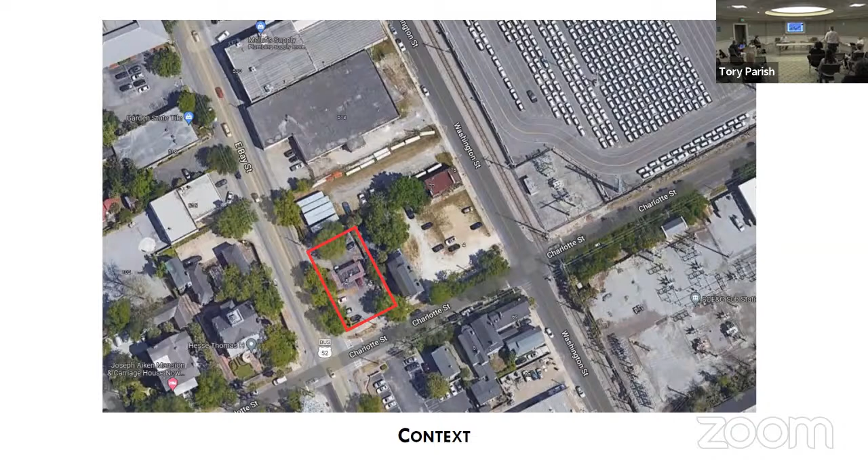I think Tory just mentioned there's an old bank drive-through building there that was built in 1993. I don't think it's been used for a long time; it's just a vacant parking lot basically there now, so we'd like permission to tear that down. We did go through a rezoning of the property, I think it was last week, with the Planning Commission, and received unanimous approval for residential rezoning. We'd like to be able to tear this building down and proceed forward with our plans. So if you have any questions.

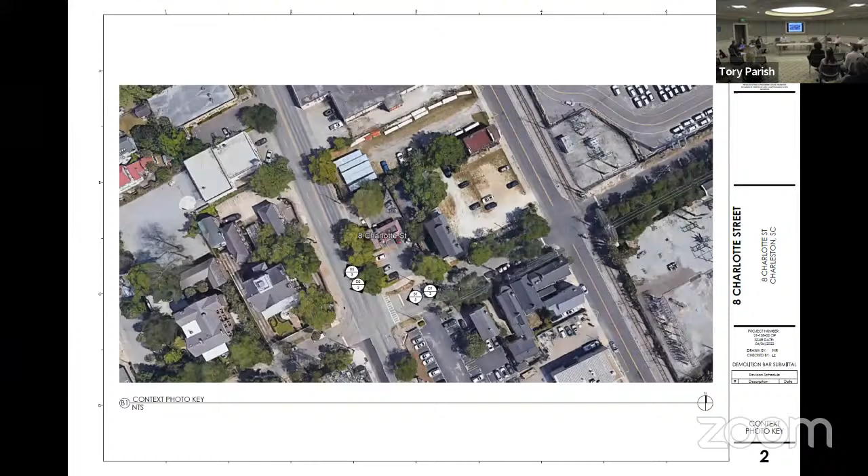Any public comment? We don't have any written public comment. Any member of the public here to speak on agenda item number 2? Hearing none, city staff comments and recommendations.

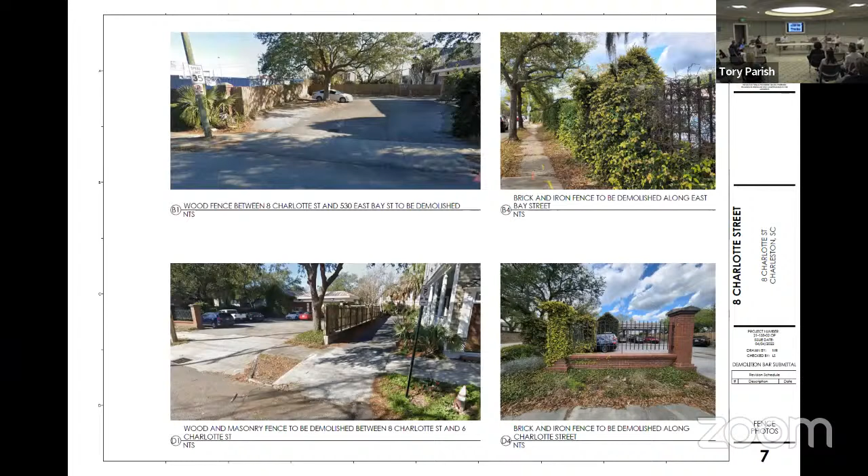A couple of staff comments. Reviewing considerations for demolition review found in section 54-240, article B, staff finds nothing that would elevate the structure and site elements on the property to be important enough to be saved from demolition or saved for a future project. The date of construction for the building and site elements and the auto-oriented function do not contribute to historic, cultural, or architectural importance. The applicant might consider retaining the wood fence due to its good condition if useful, and we're recommending final approval for demolition.

Thank you. Just as a matter of protocol and good order, I'd note that on one of the slides there's a typo that says the structure was circa 1933. I know it got revised, but for anyone who cares about 20th century architecture and our sensitivity to it, this is a 1993 structure, not a 1933 structure, as Mr. Hofford said in his remarks. Just making sure we're all on the same page on that, we don't want any confusion. No, just making sure it didn't end up in the paper.

That concludes the city staff comments and recommendations. Mr. Hofford, if you want to rebut or have anything to add, you may.

Yeah, very quickly, that wooden fence is in the way of any construction and it's uncontrolled, so I just want to make sure. No, and we don't mean that as a directive. Okay, thank you, nothing further. That's it, Mr. Hofford. Okay, very good.

We will now move to board discussion and potential vote on this agenda item. Is there any board discussion on this? I've prepared a lengthy statement that I can summarize by a motion for final approval. There's a motion for final approval for demolition from Mr. White on agenda item number 2. There's a second from Mr. Metters. I'll proceed to call the roll.

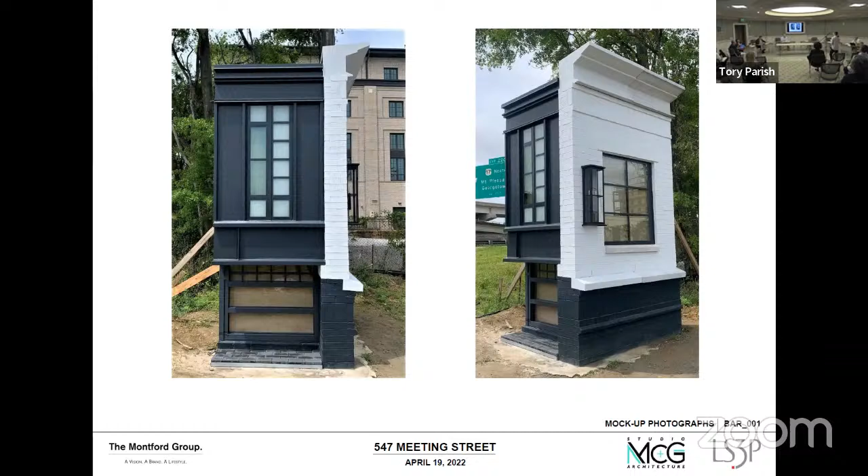These profiles are going to be 60 feet in the air or higher. It's a lighter weight material, so it's more appropriate for this application. It's also non-porous, so compared to the GFRC, it won't have as much discoloration and seepage of water, and it can be installed in longer sections, which is more in line with our design intent. We're also confident in the lifespan of the material, as well as the color control we have and the crisp, clean look it gives. You can go to the next slide to see the details comparing the two materials, as well as take a closer look at the joints in the metal panel.

It should also be noted that the condition where the metal panel meets the FRP cornice on the top corner does not exist in the building. It's just how the mock-up panel is constructed. And I think those were the main concerns. I hope I've addressed them.

I look forward to working with the board as this project moves forward, and I appreciate all of your time. Thank you very much, Ms. Brown.

Public comments on either category on this agenda item? None? None written. Thank you.

City staff comments and recommendations? Sure. Sealant around dark windows, that white painted brick should be white. Applicant discussed this prior to the meeting and agrees.

Additionally, sealant and metalwork at the metal portion of the mock-up will need to be cleaned and tightened. It is believed this has been discussed by the applicant prior to the meeting as well, and they agree.

The applicant requested the additional placement of GFRP on the mock-up as an alternative to the GFRC band at the second floor. While having some advantages in terms of handling, forming, and placement, staff still prefers the GFRC for its perceived increased durability. It was also discussed whether to paint the cast stone windowsill to match the brick.

There are various ways to think about this, and staff would like the board's direction on this. And modifications and corrections of the above items to the mock-up should take place and be approved prior to the start of exterior work.

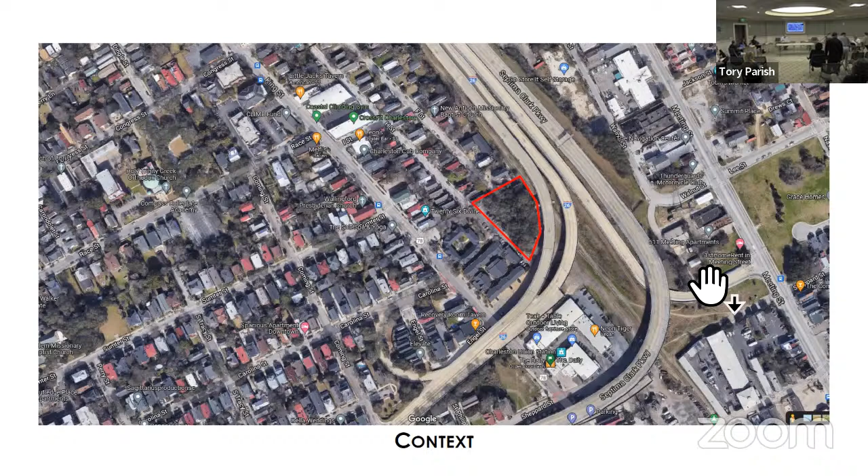Thank you, sir. My name is Brian Hessler, I'm an architect with McMillan Smith, creative architects for this project. Our owner and representative, AHE, unfortunately had a medical issue, so he could not be here today. But we do have Remark Studio here to talk about some of the landscape architecture portion as well, when we get to that.

For the project, I'd like to emphasize that for this particular project, affordable housing means 30 to 80% of the area median income. There have been questions about that from the community. Our client for this project is the city. We're hired by NHE, who's hired by the city. There are improvements on the housing authority property as a scope part of this, but they're not the client for that, so I just want to clarify that before we continue.

This project was presented to the board in the fall of 2021. We were deferred. We took those comments back, and I think we have a design that is in the right direction this time. Due to the scope of the building and the site, I'd like to request a 10-minute time extension from the board. Certainly. Any idea how much additional time? I'd like to do 10 minutes, please. An additional 10, sure.

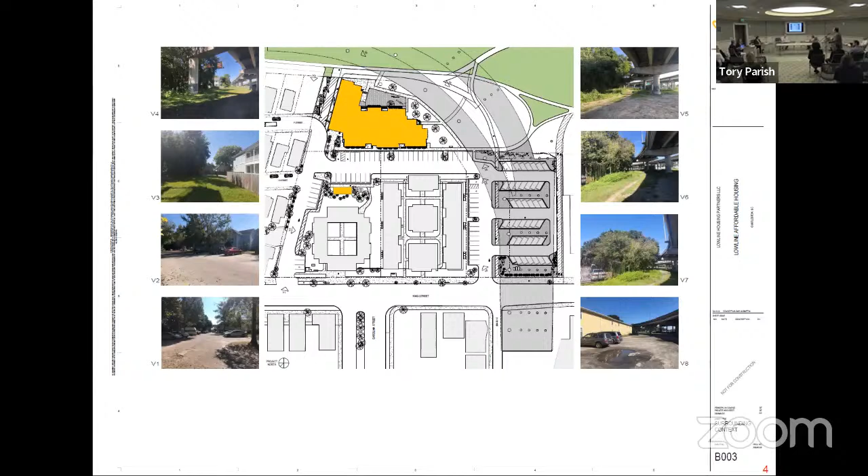You can see a little bit of that context here. Currently, the overpass underneath there is a little bleak. See the blue housing authority building in that photo. Next, please.

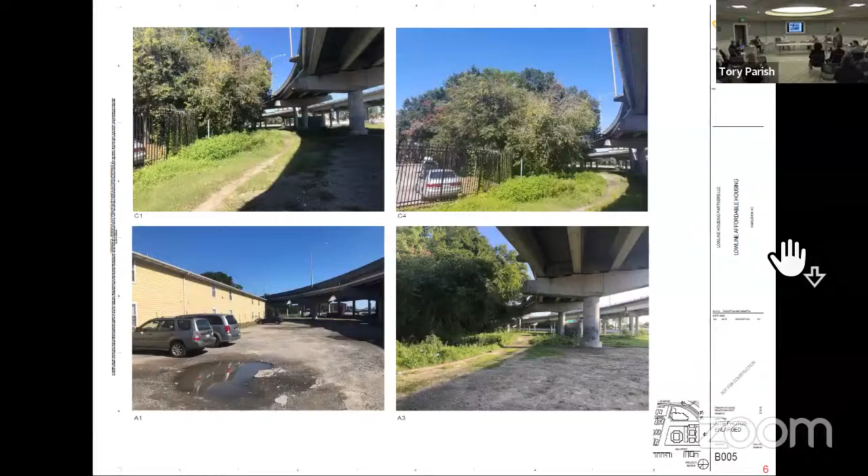Additional context, photos of the underpass. Next, please.

The parking for this project is self-contained within the development. There are approximately 90 spaces. 30 of them are dedicated to the housing authority, 30 of them are dedicated to this new development, and 30 of them are dedicated to public use for access to the low line, restaurants, bars, whatever the public might need in that neighborhood. Next, please.

F and H Street will be connected to this project based on direction from the city, but direct access to this development is not needed through F and H Street. It provides a connection to the community, but it's not required for the success or failure of this project.

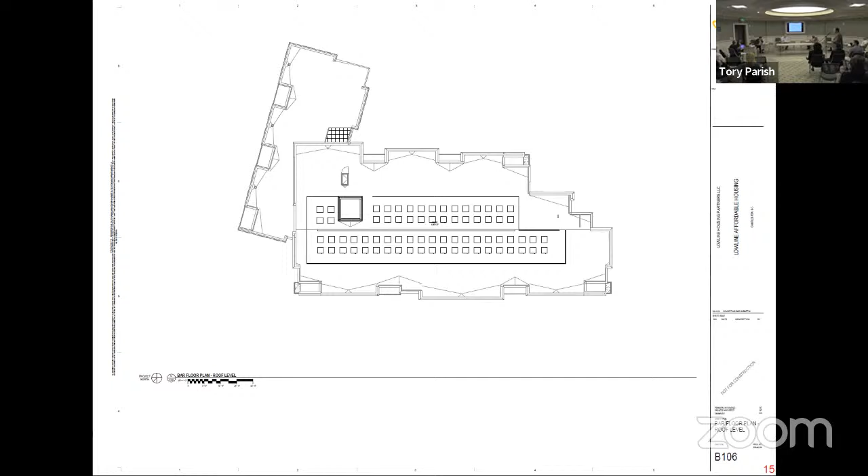Next, please. And that language is carried through all the facades.

One of the other comments we got from the board last time was the depth of the punch windows. That has been increased from about 6 inches to 8 inches. It's a little hard to see here, but I want to point out that comment has been addressed.

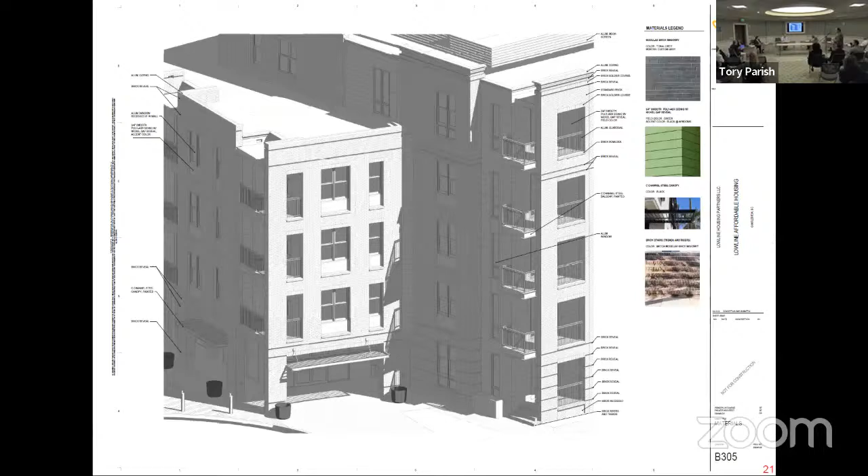Same thing on this facade. I think we'll see a 3D version of it that'll make it a little easier. You can see this in 3D a little bit better with the brick rustication, the shadows, and the unified balconies.

We also got some questions last time on the fiber cement siding. We have revised that to a Boral poly-ash product, a 3/4 inch thick product. It has a nickel reveal and we're running it horizontally, so it matches the more residential siding, but on a larger scale. It also has the ability to have nice, clean, crisp corners where we don't have to have a lot of clapboard trim pieces, which I think works with this aesthetic well.

You can see the brick steps, where previously we just had simple concrete steps.

This is a view approaching the project from King Street. You can see the dumpster enclosure has been relocated, and F Street is opened up on this drawing.

Another view as you get closer to the project. The housing authority buildings would be on the right, and the access to the plaza is to the left. You can kind of see how the massing of the 4- and 5-story portion has been broken down there.

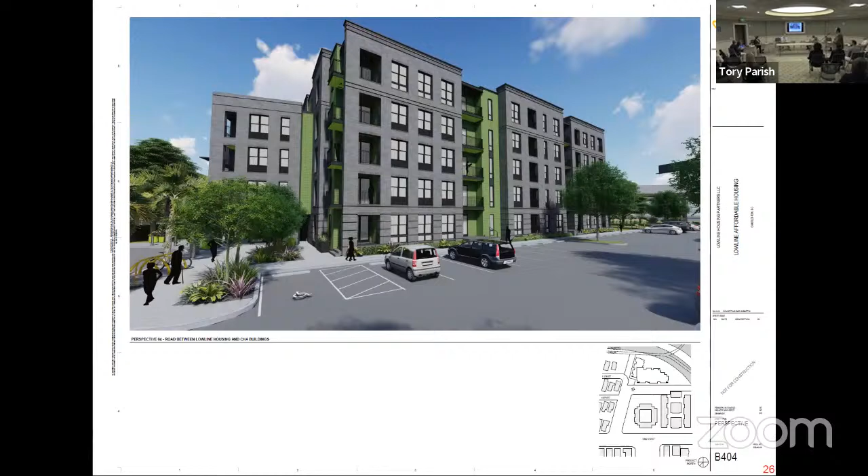This drawing shows the shadows, the brick reveals, the depth of the windows, and the different types of windows in a little bit more clarity than we were able to show last time.

There's what we're calling a courtyard between the building and the overpass that Remark will talk about in more detail, so that there are multiple exterior spaces for the public and the residents.

It's a view of the project from the future low line.

Another view of the project from the low line, looking back at that courtyard.

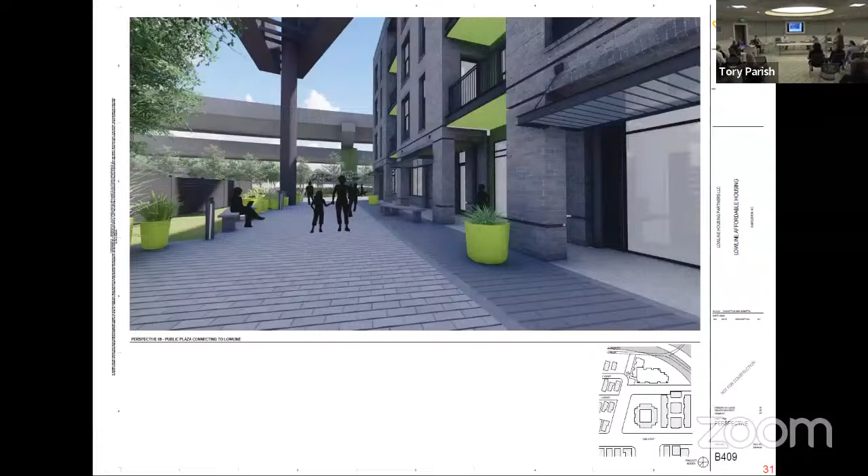This is a view of the plaza area with permeable pavers, and the canopy language has been added to this elevation of the building, where previously it was only at the main entry. So we think that makes this look a little more even in scale and more welcoming than what we had.

We were also asked last time to take a closer look at what we're doing under the overpass, our only frontage on King Street. This area has been a bit of a challenge. Some of the things we're working with here are trying to create an urban edge while also making it safe for the parking lot. So we have something low that creates the urban edge, but we also have a lot of restrictions from DOT for what we can and cannot do on the property.

Our current proposal - you can see with multiple projects under overpasses around town, they look generally pretty bleak, since DOT only really allows fencing. So we're taking a different approach, where we're going to have a series of planter boxes that don't have the foundations DOT objects to. You can block the glare from the headlights, but still promote the safety and security of the parking lot, which we think fixes it.

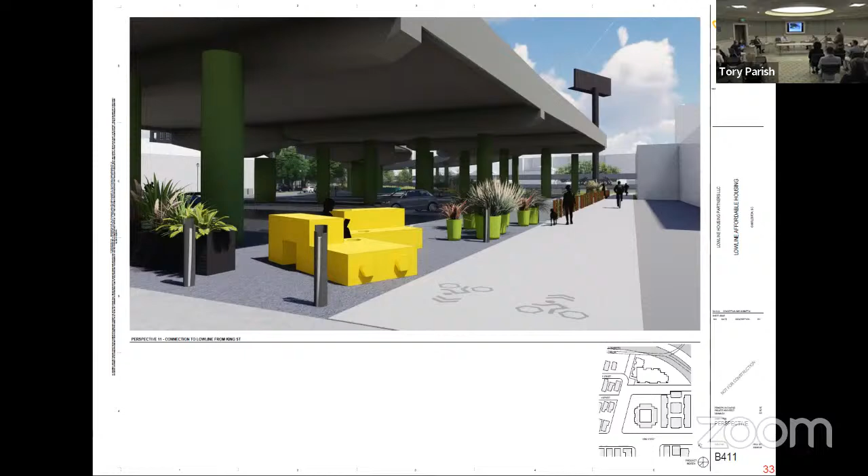We were also asked last time to see if we can make that wall or surface along King Street turn into the connections to the low line and the parking lot. We plan to introduce some type of intervention at that point and carry the planters and site wall through that area. The final form may not look exactly like this, but it represents the idea of transforming that into a kind of gateway.

Unfortunately, that billboard's going to remain there, we don't have to get rid of it. But you can see the detail we put into the cap of the building, and then the other view is as you're going around the building towards the rear. You only get a real brief glimpse of this building from the overpass with the billboard in the way and the direction of the one-way traffic, but we think we've made some improvements to address the concerns we saw last time.

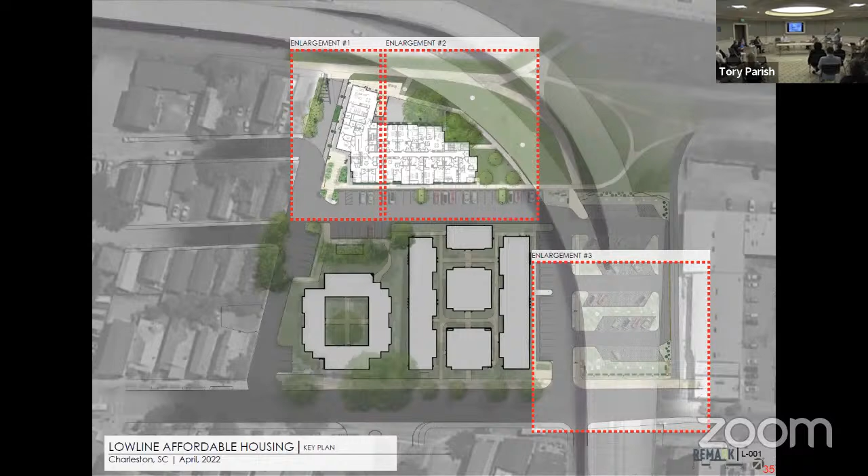The first one is the main entrance. As Brian stated, this is one of the main connections off of King Street, located at Main Promenade. One of the main things is that we provide access to the low line, and as you see, straight through there, we provide that through, and it's as wide as it is due to the fact that we have a fire access easement that we have to provide.

To the left, we have a series of rain gardens and some seating elements that almost mimic some railroad ties, kind of tying back into the whole idea of what the low line used to be, a railway system. And then the rain gardens carry over into kind of the front entryway.

Some of the plants that we're focusing on for the rain gardens are all natives, very durable. This just shows a section to represent kind of the spatial representation through that area, showing that fire access easement and kind of what we built.

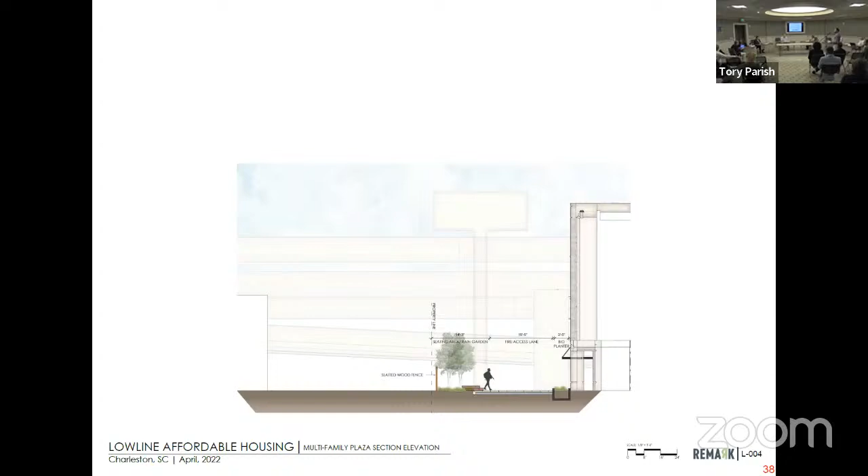The second area of focus is what we're calling the courtyard, creating a space for not just the residents, but for people that are on the low line to look in, and we're thinking about what will they see. But for the residents that will be in this building, we propose to keep this fairly open, but also considering it to be low maintenance.

An all gravel area, considered to be an area for recreation, lounging, some slight furnishings in there. Another key element is the existing oaks that we show. I think they're there, but they are existing. They are a little close to the building, but they're able to be saved.

I just think that'll be somewhat nice to see some greenery pop up over the I-26 overpass, and it also provides a little bit of screening. This just shows a couple plants that we could plant in some planters right up against the building, again focusing on the low maintenance aspect of it, while still providing some greenery.

The last area is the parking underneath the I-26 overpass, connection to the low line. As Brian stated, the main connection to the low line off of King Street is at that bottom right-hand corner. And then another key element is the plant boxes or decorative planters that we have on King Street.

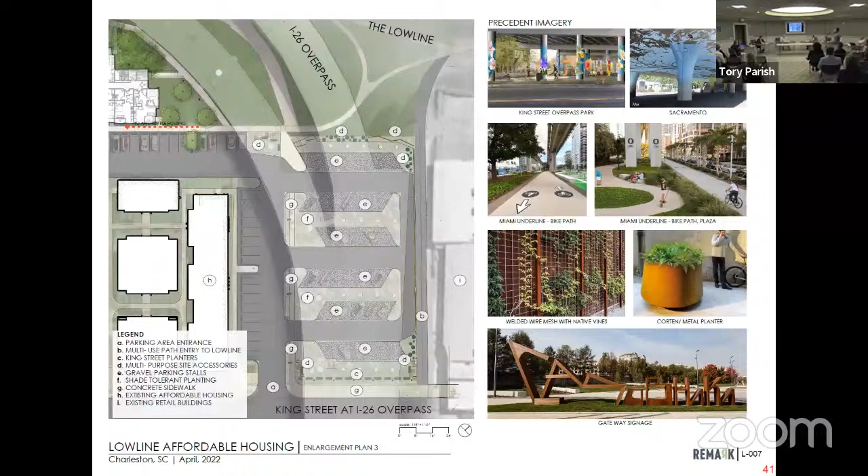Again, going with all native plants, showing what can be planted in a more shaded area, given that we have that I-26 overpass. And again, low maintenance.

Overall, safety is key, so we felt like that cuts down on interweaving of pedestrians and vehicles.

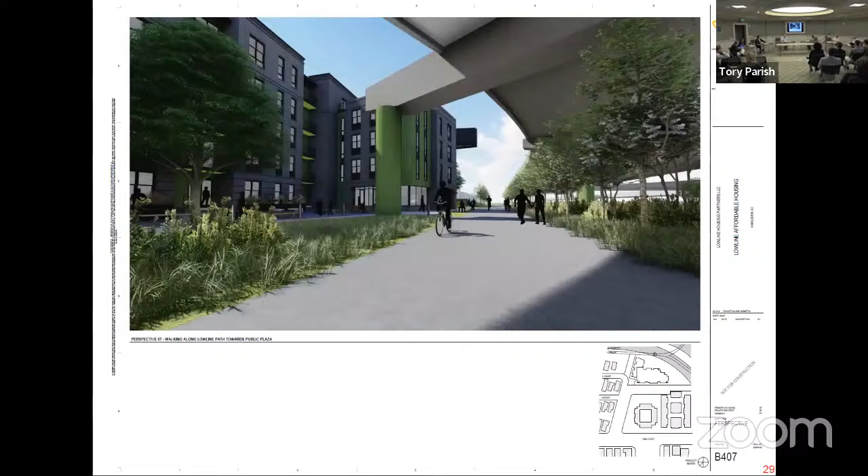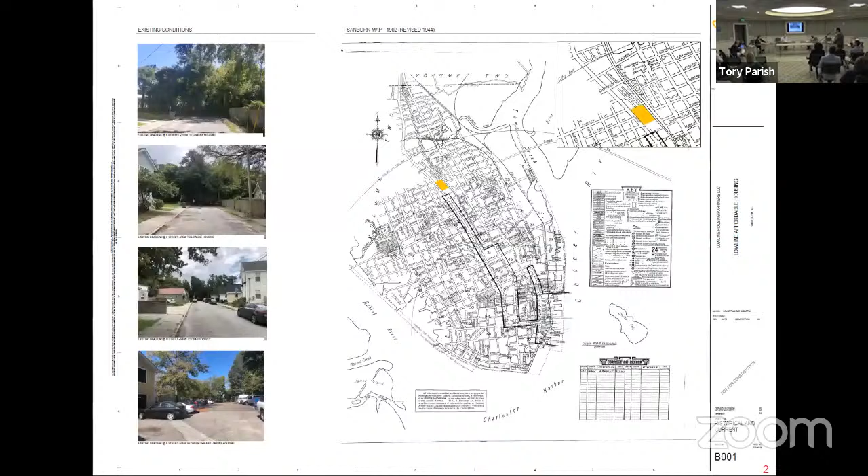Thanks. Right, the blue lines represent connections to King Street. They are two-way, ingress and egress from both those exits. F and H Street, I know there's been some meetings with the community groups. The city, I think, has given them some opportunity for input in terms of whether those streets are one-way, two-way, parking on two sides, parking on one side. And that's something beyond the scope of this project, but that may be resolved in the next year or so, I think.

Mr. Chairman, it's one of my favorite things to do when I get tired and think I don't have anything to do, to go walk up one-way streets and look at structures that you don't otherwise would appreciate, like the neighborhood does.

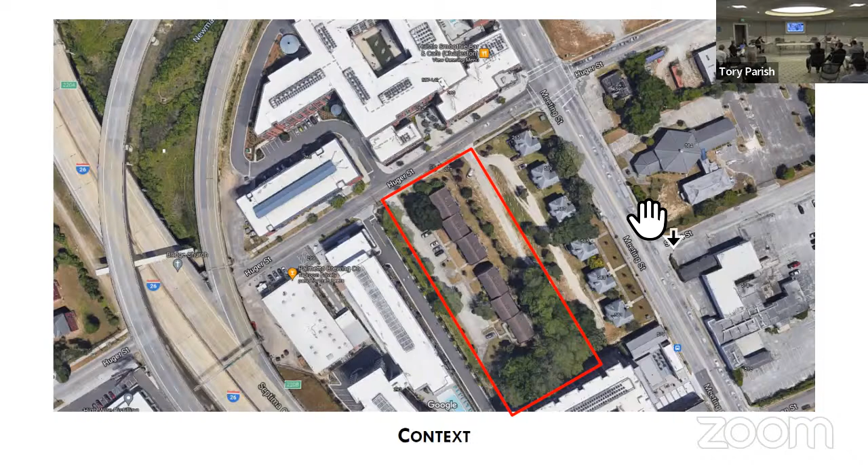All right, we're moving on to agenda item number 5, 275 Huger Street, requesting preliminary approval for construction of a 77-unit affordable housing apartment building with surface parking. This is in the East Central Neighborhood, Height District 4, and the Historic Corridor District. We've got some context slides for you showing the location on the south side of Huger Street, looking into the site as it is today.

Okay, Mr. Eddie Bello is presenting this one. Mr. Chairman, I want to note that Mr. Bello has 91 slides - I'm going to go through each one. But lots of extra time. You asking for extra time now? Mr. Metters is going to ask you questions about 5 of those.

No, well first, again, I'm Eddie Bello with Bello Garris Architects. It's great to see everybody in person - it's been a long time, it's nice to see you all. I also have on our team Nick Litza, who's the project architect, and Jordan Stucco - I think I said your name right.

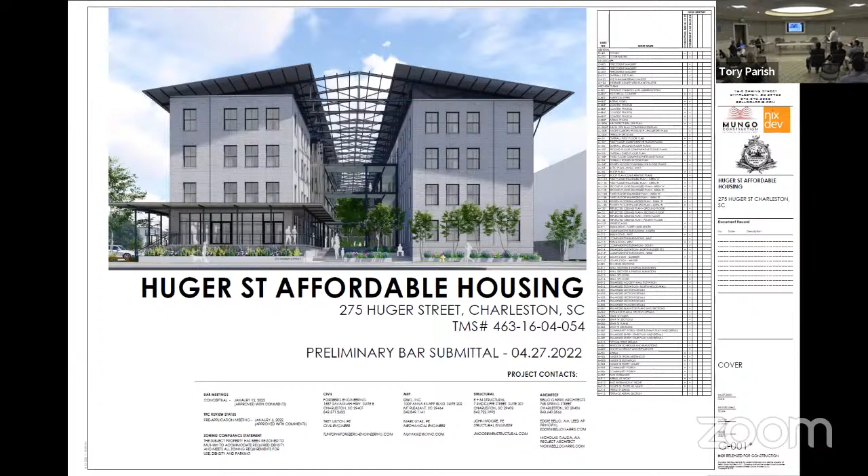All right, next slide, Lawrence. Just to remind everyone, this is again an affordable housing project we're super excited about our design. I'm personally very interested in affordable housing, and it's great to be involved with this.

As I said last time, conceptually we got a lot of inspiration from the history of the site. Historically, this used to be the neck, so the neck moved north. It's always been very industrial, and so the aesthetic we have for this building was derived from that industrial nature.

Next slide, Lawrence. That's good, keep me going. Let's get speed presentation. Like I said last time, we've got some historic buildings on Meeting Street, the Grant homes, that we are away from but sensitive to. Otherwise, we've got a lot of fairly large apartment buildings around us.

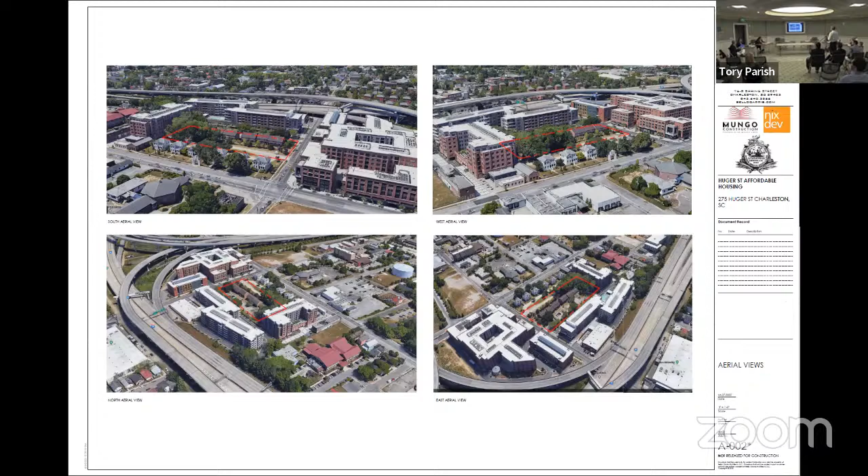Again, more context. Next slide, please. These are the buildings that are actually on our block and across the street. Next slide.

Again, you see where we are. So Huger is the street to the left, and this is a good graphic because it shows the larger buildings that have been built recently, as everyone knows. And then just to the south of us, to the right, are several other fairly large apartment buildings.

And again, this is what we said last time, that they're all very fairly boxy, they feel very heavy. I'm not really criticizing the buildings, it's a tough program to have with the parking and everything. One of the things we wanted to do with our building was to be very distinctive from those large, sort of boxy buildings — something a little fresher. Next slide.

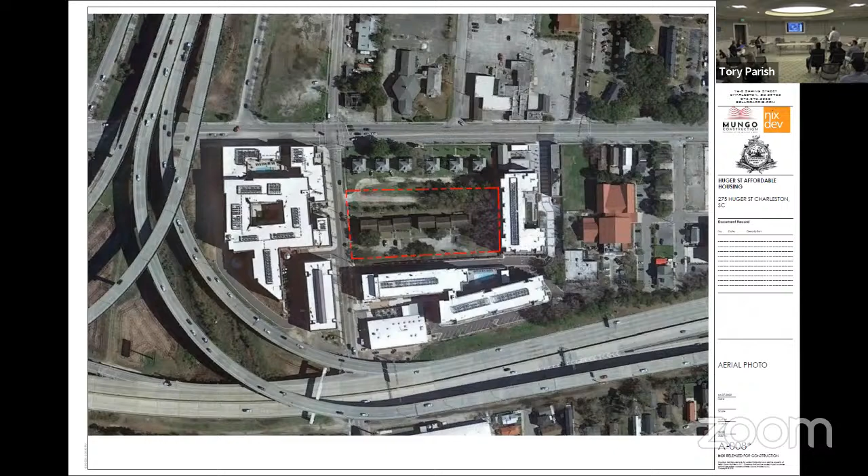So I'm going to go to the next one because I think it's previous and proposed, so I'll talk about the changes more. This is our current site plan. Again, like I said last time, a lot of those other buildings have a typical apartment building approach where you have a double loaded core, a long interior hallway with rooms on either side.

We broke our building into two so we wouldn't have that condition, and we have all of our circulation as a central spine in this sort of open air gallery type space. We front Huger Street, of course, as we should, and we also have a secondary entrance from the parking lot to the east, which by chance worked out so that it aligns with the arch — you can see it at the top of the page there.

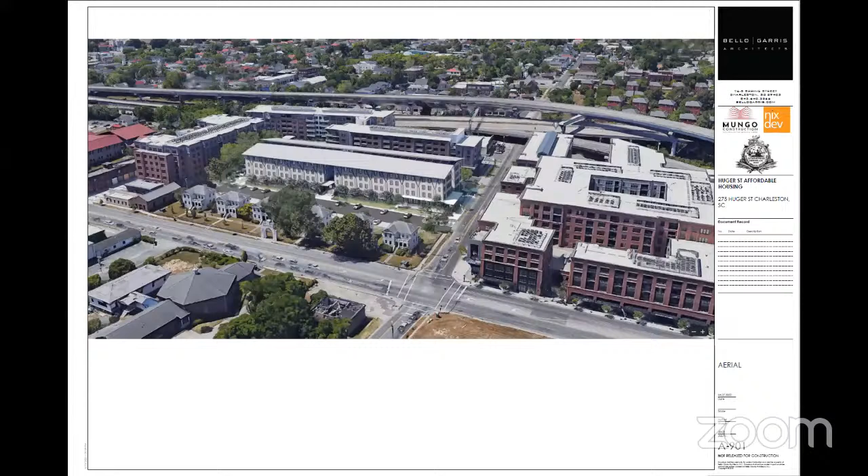Next slide, I think this shows existing, previous, and proposed. Well anyway, let's just stay on this one for a second. Again, the idea is this shed — we've got now four masses going by the shed for the structure. Next slide.

We have, this was all approved at conceptual, an entry element that terraces up. We intentionally did not put this over parking — we wanted to keep it close to the ground as we could, so it addresses the street well. We broke it up in certain ways. Very, very simple structure.

We also eliminated this heated addition space, and now it's completely open. So now basically we have four components, which a lot of our work has been developing. Next slide.

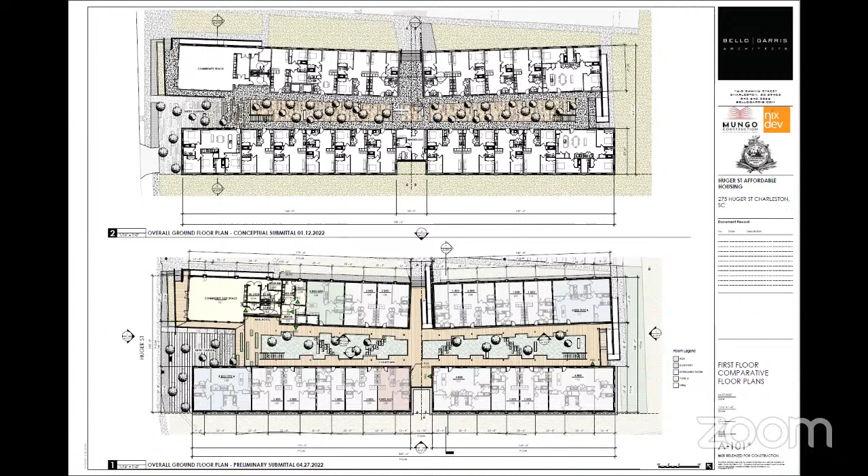I'll try to go through these. So the floor plan in the back, this is our current floor plan, showing previous and proposed. I think the takeaway here is you can see it's all open — very much open space, and you can tell we've increased it as much as we can. Next slide, this is the other floor plans.

Also, I know staff hates dryer vents and those types of things — all of the vents, everything is interior. That's something else. Next slide, so Lawrence doesn't have to put that big red X.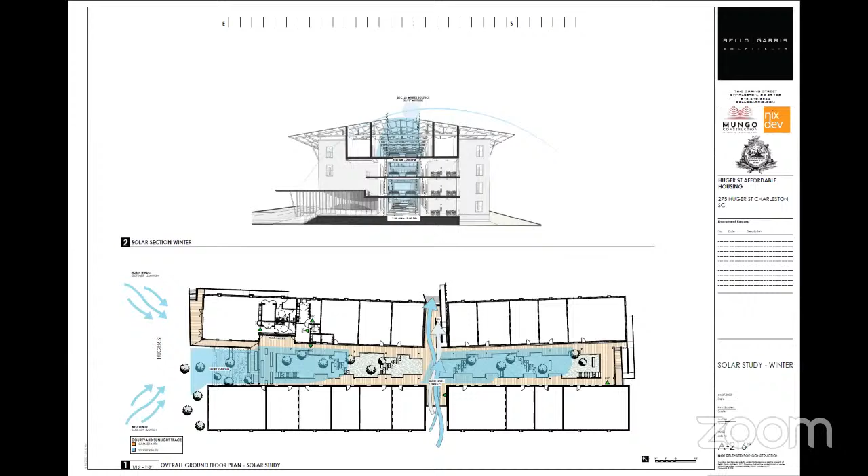Winter, the next one, only has 2.5 hours because the sun's lower, but that's still a good bit of sun. I think it's more important to have it in the summer, actually, because it's a wetter season. And of course, we worked with the landscape folks to make sure the plants selected would thrive in that. I think that was one of the big things we got from last time, to think about that a little bit more.

This is just an enlarged plan of the front entrance. These are conceptual plans, but just to repeat, the UGs are here, we intentionally were addressing Huger. I feel like a lot of our large villages are close to the street, so we pulled ours back a little bit as much as we could, and then they're staggered, and this is a fairly grand but understated step terrace as you go into that space.

I think the takeaway from all our drawings I've talked over is the size, we've done a lot of work since we started developing the project.

Just an enlarged area of the front. I think this shows how the entrance works, this is the section through that entrance, with an outdoor terrace in front. This is a section through the joint.

All right, so here's the front, and I think the next slide is landscape. Stephen with Remark.

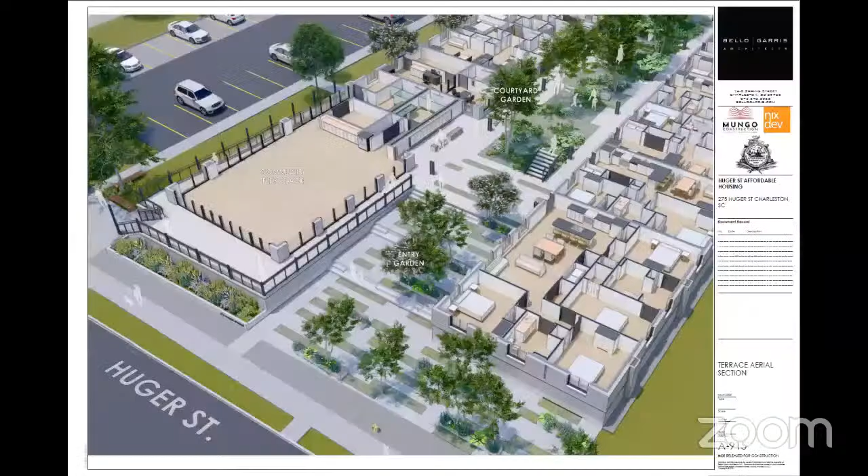I'll go quickly, really now it's just more detail. This is just a section that we cut showing how that terracing works. We were excited to know that we've got some trees in there.

Next slide, this is the east. One of the comments last time was about those pilasters and how to make them a little more pronounced. So we've done that—they're deeper now, and we have a cast stone canopy. We figured out how all that steel would really work.

Our color palette is fairly muted. We're trying to tie into the Grant homes, which is a white brick, so right now we've got this brick as an initial selection. I want it to be very simple. The windows are black with interior detailing, which really isn't a lot of your purview.

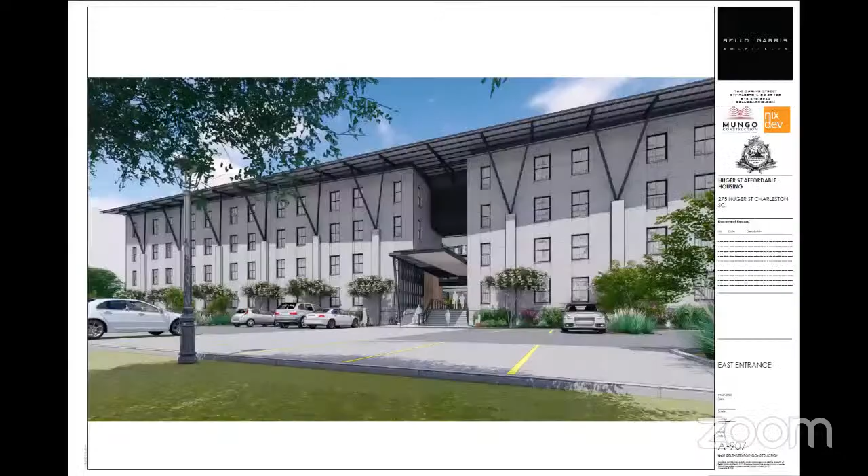Here's a view of that side east entry, which will be heavily used because that's where the parking lot is. There was a comment last time to maybe consider breaking up the roof, and we studied that. We didn't want to do that for a couple of reasons. One, now we have four masses.

The roof joins them together. I think a lot of times the notion of breaking up buildings is appropriate for some of these larger buildings that are up on the street and feel too heavy. This isn't on the street—the part that's on the street is already broken up. So we just felt that breaking it further took away from that shed idea.

Also, we've got to connect the mechanical up there, and if we pulled that roof back, not only would it not provide cover for the entrance, it would create problems with hiding all of our mechanical.

Next slide. This is the entrance—a little hard to read on this slide, but that side entrance has this vibrant wood and steel canopy and wall to mark that entrance. So at the pedestrian level, it is very broken up.

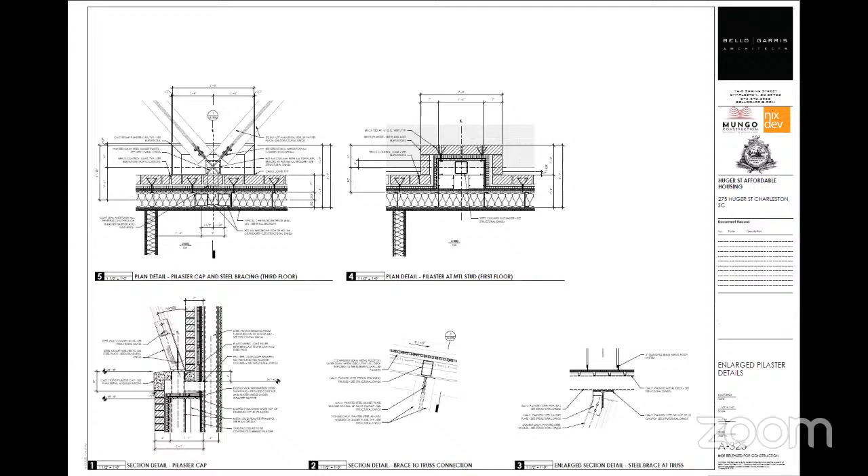More details, if there are questions—pretty straightforward. We worked hard on making sure the details are clean and elegant. Next slide. This shows that canopy. Next slide.

Detail—this is a section through that front, and this is how that canopy works. It's two columns and then a stained canopy, which I think will hold up well because it's underneath. Next slide.

This shows, as I showed last time but more developed now, how the mechanical works up in here. Standing down here, you'll maybe—well, we don't have to see the mechanical anyway. We've also, not that it matters yet for the board, figured out where all the electrical panels go and all that.

Next slide, just more details. We have some cast stone elements—you can see that we have a belt course that goes around this cast stone.

Next slide. I don't know how much of this we need to get into, just showing—again, we're asking for final details to staff, so we're just showing that we've figured out what we need to. Next slide, and really you can just go through these quickly unless there's some reason.

One thing that was brought up last time by staff was that it would be nice to cover those interior stairs. That's problematic for a couple of reasons.

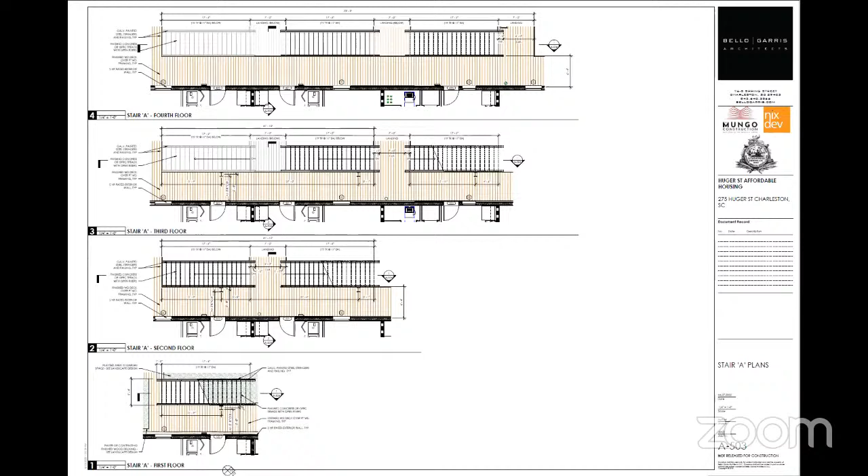But another reason is we're worried that it's going to feel even darker, and our goal in that whole space is to have it as open as possible. We've done similar stairs like this in other projects, and they worked out fine. Williams Stairs is a perfect example. These are just like Williams Stairs. Next slide.

So it's not like we didn't pay attention to that. We studied it, just we couldn't do it. Next slide. Also, I don't know how much you can see that. Next one. Sorry, Lawrence, get to the end here.

I think we have just a couple of renderings at the end. I'll just end on those. Yeah, we figured out most everything we need. Next slide. There's that entry, that entry there, the middle, left. Pretty dynamic wall there. Next slide.

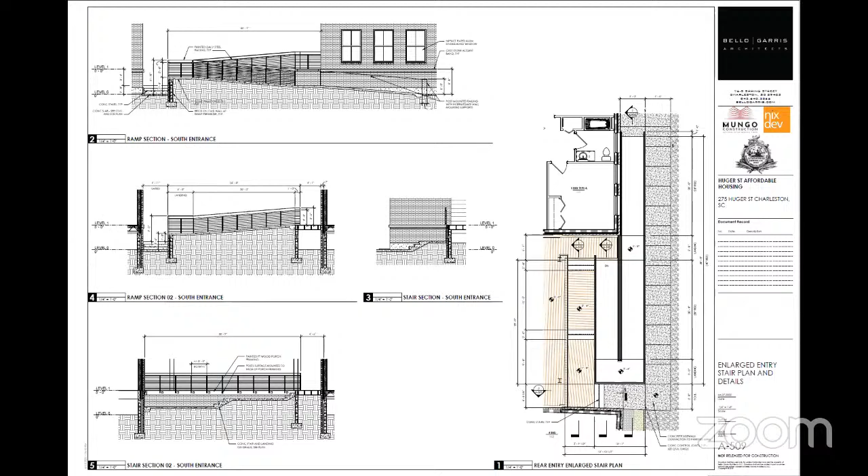Try to see. Yeah, we showed something similar to this last time. And the last one, I think, is a rendering too. Either one of those is fine. Actually, go to the next one. Just end on that.

Okay, I know I went over the time, but I'll blame the remark guys.

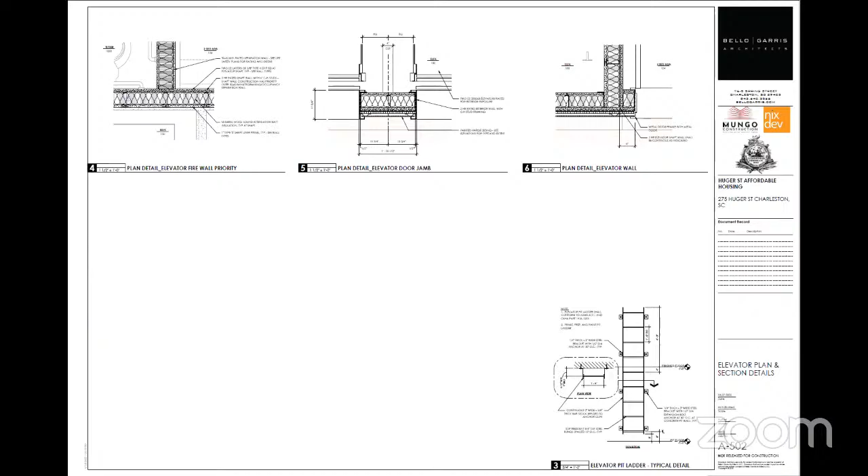Okay, I'm going to actually use that board in a second, but I'll read these first. Three comments. Number one, planting strips are proposed at the north entry terraces and within the boardwalk. To some degree, these reduce the overall width of the Huger Street entry, but provide nicely integrated green space for the main elevation. Staff recommends added scrutiny and coordination between the architectural site plan and landscape plans to ensure a clear and distinct entry path from Huger Street.

Per previous board comment, board motion and staff comment, transitions of materials at horizontal locations should be offset in plane or meaningfully detailed. Concern remains regarding the transition from brick to siding at the fourth floor north end. Please confirm detail or visibility. And three, while not visible from the public right of way at the ground floor at the intersection of the central corridor and the east entry, staff recommends pulling back the southern planting bed to respect what will most likely be the flow of foot traffic.

But I just really wanted to confirm that got the scrutiny it needed to. Number one, if you're coming from this way and you're entering the project, do you step through these terraces, or is this the only 5-foot wide entry? So the comment really is in the vein of, should this be a little wider and grander if it's the only clear distinct path?

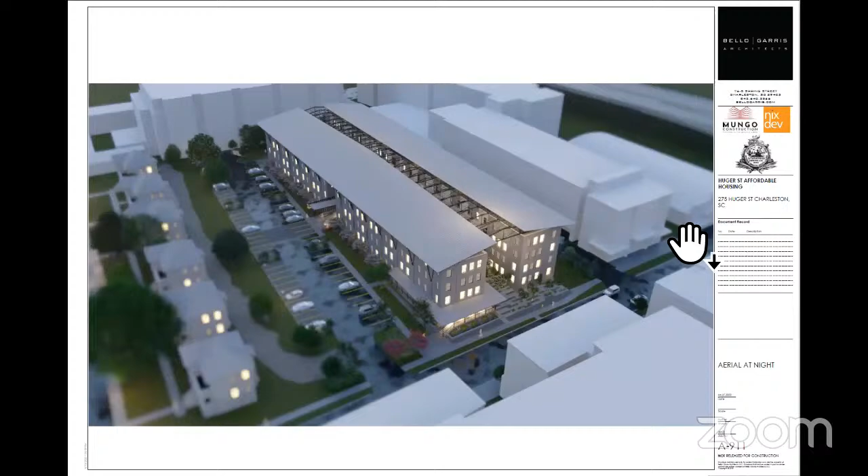How far back it was. Okay, but that's good. Thinking about people coming from the parking lot and coming this way, that just seems like an area where people are going to step through, and recommendation to pull it back and put hardscape. That's all for staff. We are recommending preliminary approval with board and staff comments.

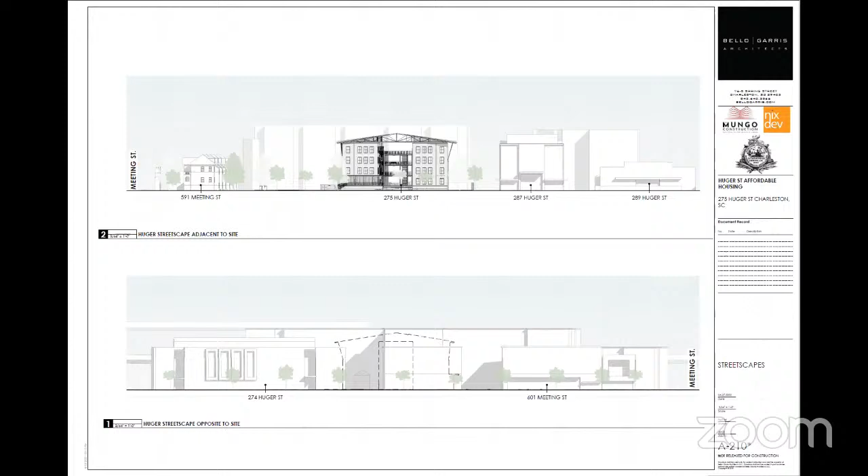No, that was a thing—the horizontal transition up at the fourth floor. You can't really tell, this isn't a clear view, but where that changes, the brick turns back. It's not a brick and then a joint; it actually recesses a little bit, and we're good. You're not going to see Hamilton Street because of the way it is, but it's not just like a butt joint with caulk.

I will repeat my request to please consider final details with staff, since it's not major issues. I might interject—I didn't realize that was part of the request, but we don't have a concern about that. Thank you. And I know Mr. Bello mentioned that twice in phases of his presentation, so we hear the applicant loud and clear on that request.

Having concluded the applicant's response, we will move to board discussions and a potential vote on this agenda item.

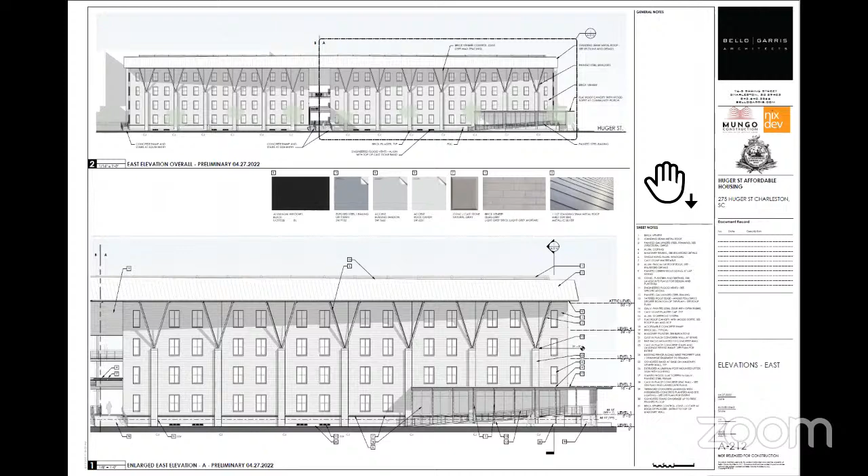Mr. Chairman, I got a couple of questions for Eddie. Eddie, it's nothing we hadn't talked about before. Lawrence, it's either A903 or A913—it seems to show that screening you were talking about, which would connect your primary or main roof to that floating roof.

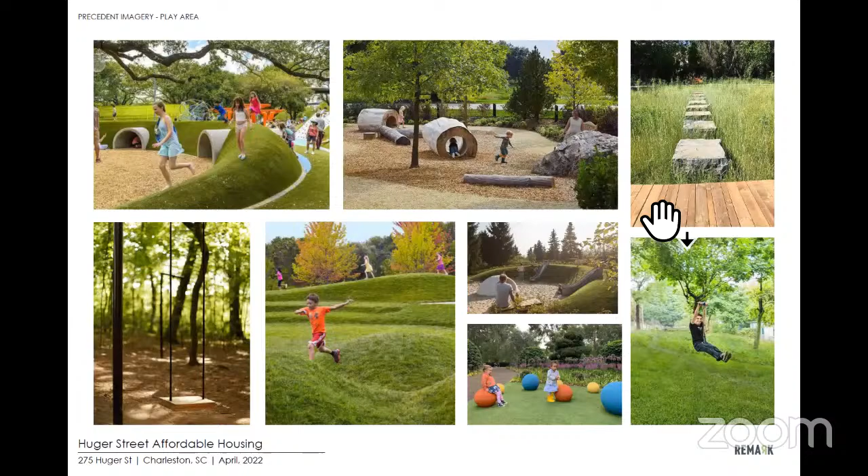So the question is, does that screening prevent birds, bats, or other pests from accessing the area between the top of that building and the bottom of the screen, or is it open? If we're standing on, say, two runs of buildings with a roof on top of that fourth floor, is there access or is it screened? I see it's ventilated in various ways as I study the plan, but I couldn't tell you what the exact detail is.

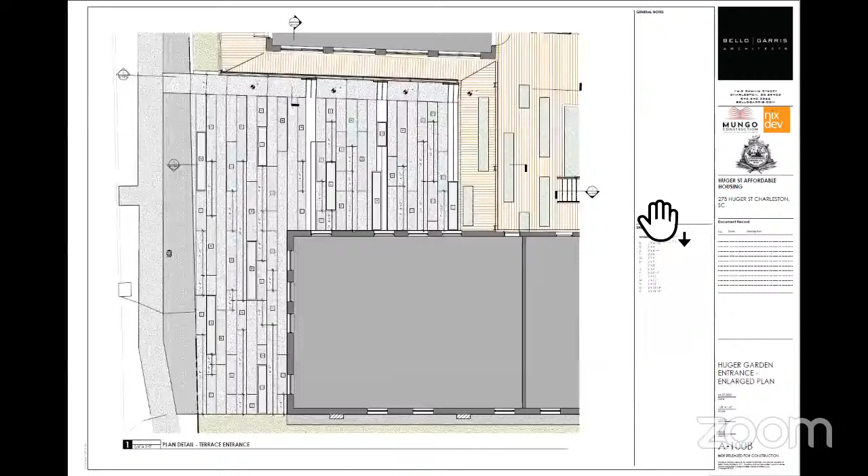Just stop at one of these, Lawrence, that shows the intersection. I don't know that we have that—we get to a section. It's hard to do, like an A906 that showed it looked like it was screened. Yeah, it goes all the way—you can kind of see it goes all the way up here. Nick and I talked about that detail.

Right, the whole element is enclosed above your building. This is closed now, the full length, all the way there. If it's not completely enclosed, there are a couple places, like on the Huger elevation, where that enclosure is pushed back behind the truss, so there's a little tiny section that's open. It's a few feet, but...

On the north and south we get that recess to exaggerate the roof overhang. There's a triangle of wire mesh on those two elevations that encloses that area. It might be 2 or 3 feet back, but it's there and keeps pests out. Running north-south it's only about 8 inches, but it goes all the way to the other side of the roof. I like that it breaks up, so I thought that was great.

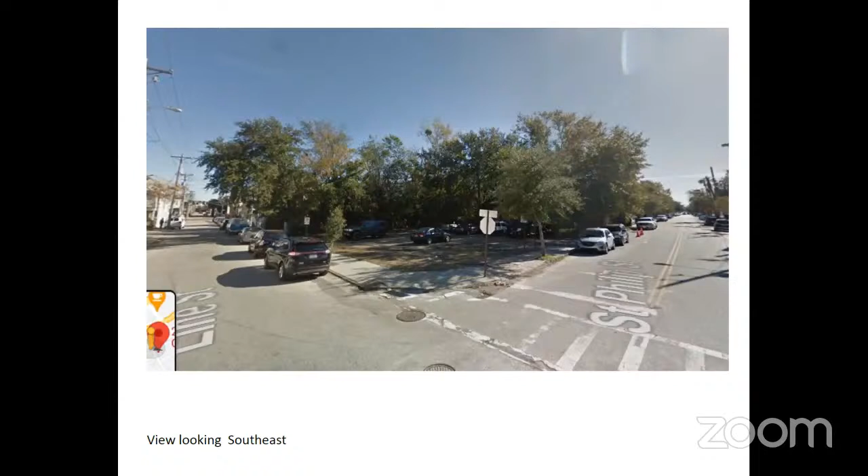Get you some context slides. This is a section of St. Philip and Line Street at the project site.

That was quick. All right, for this one we will have Mr. Dylan Tao. I'm not sure who's presenting.

Thanks everyone, Ben Lutrow, representing Greystar and Evening Post, familiar with each other on this project. So we're back for building 3, requesting conceptual approval.

Since we last met, we met again with city staff. We went back and reviewed in detail all the comments from HCF, PSC, city staff, and obviously most importantly all of the board as well. Just want y'all to know we have listened, we have directly addressed the comments, and I think you'll see that tonight. This might be a fairly quick presentation because we just attacked the comments one by one, but we do think we have a superior building. We hope y'all agree with us. I'll turn it over to Gary.

Gary Brewer from Robert A.M. Stern Architects. Just put on my glasses. Next, please.

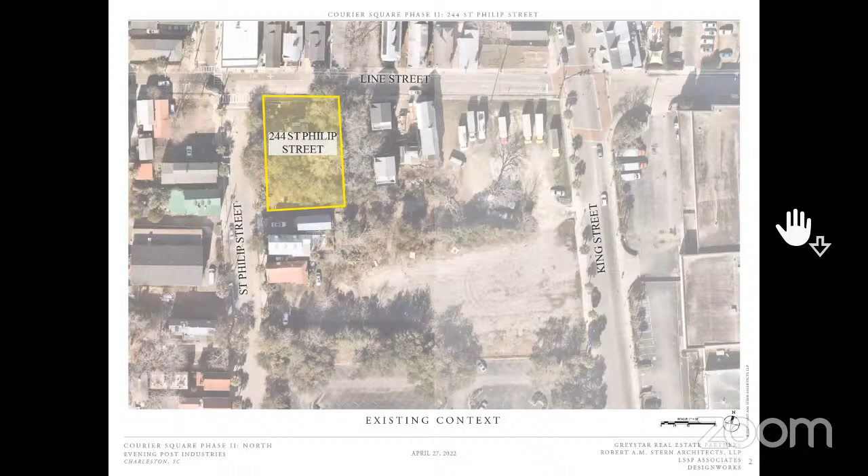The plan of the building is much the same, with a few exceptions having to do with how we modified the 4 elevations based on the comments that we heard.

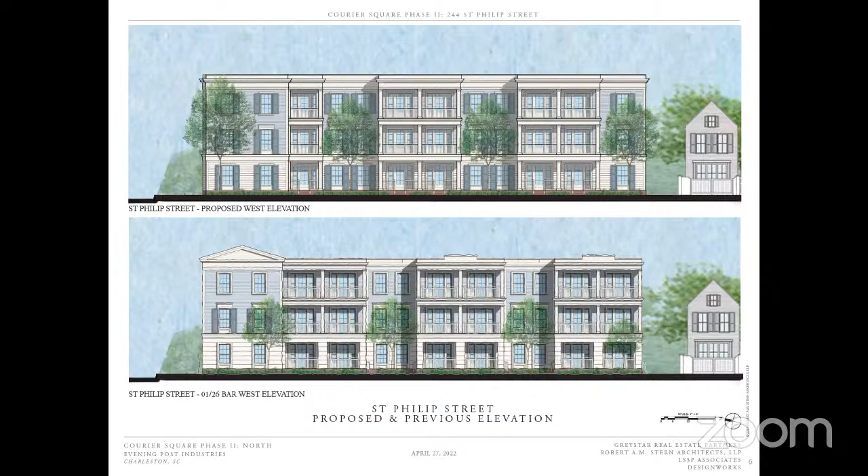Here is the proposed elevation and the site plan and the planting. We have turned the steps of the porches to face the sidewalk so that the spaces in between can be planting beds. The trees have been located to be in the hyphens so as not to block the view of the porches.

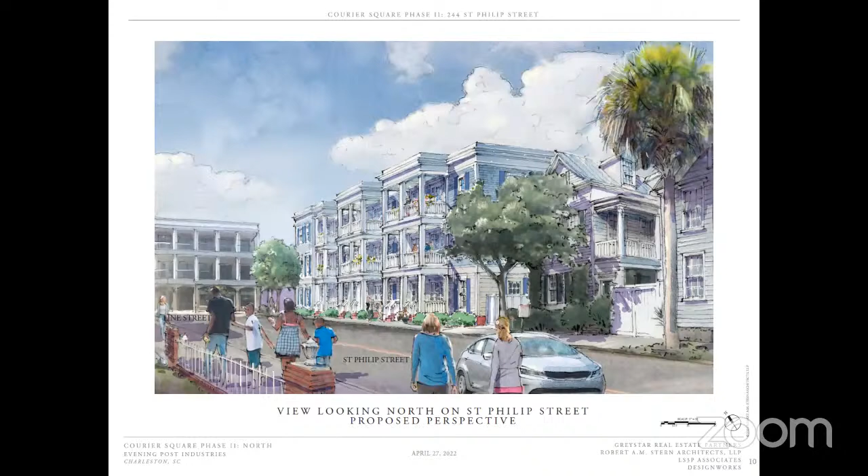We looked carefully at the houses on the same side of the street and across the street. There were board and staff and community comments about the widths of the previous design, the 2 pavilions.

On the bottom is the earlier design, and on the top is the proposed design. So what we have done is we've removed the sloped roofs, and we've bumped out 2 pavilions, which are vertical and similar to the height of the existing houses.

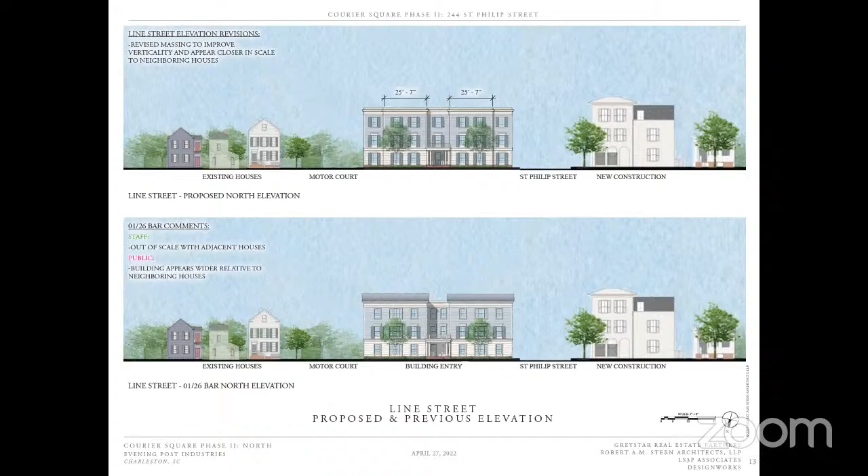Here you can see the before and the after. We've also simplified the window type to be more repetitive. You can see the entry in the middle, and then the simple clean building eave that wraps around.

The shutters are on all 3 floors. The color is a placeholder. We imagine that the building will have nice colors, but we would probably study that and propose that in the next presentation.

Next, please. And here you can see the plan that goes with it, with the entry in the middle and then the 2 bumped out pavilions to the right and to the left.

Next, please. Moving around to the south elevation, you can see it faces an adjacent house with a motor court. Next, please. And the before on the bottom and the proposed on the top.

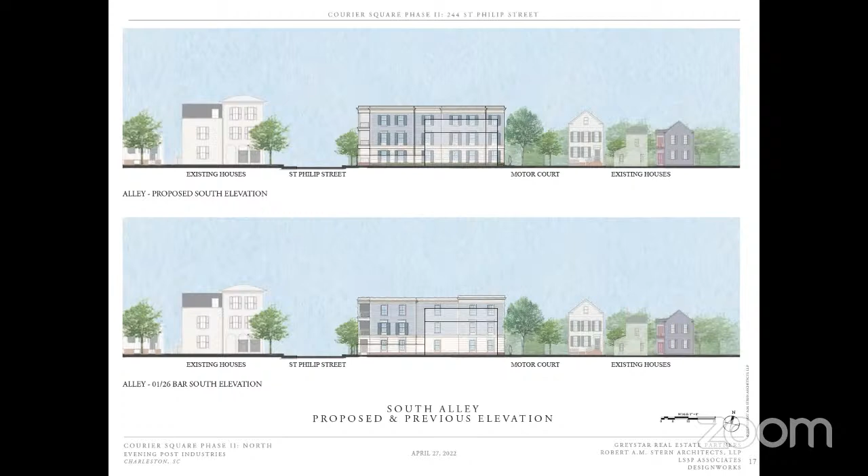Next, please. And the top shows that we've taken the idea of the 2 pavilions we just described on Line Street, and we've carried it to the south. The outline in the foreground shows the house that's blocking most of it, but the pavilion on the southwest will be visible from that house's motor court.

Double hung windows and shutters on every opening. Next, please. And there is the plan that goes with it. Next, please.

Finally, moving around to the east elevation that faces the motor court, we've made significant changes here. Next, please.

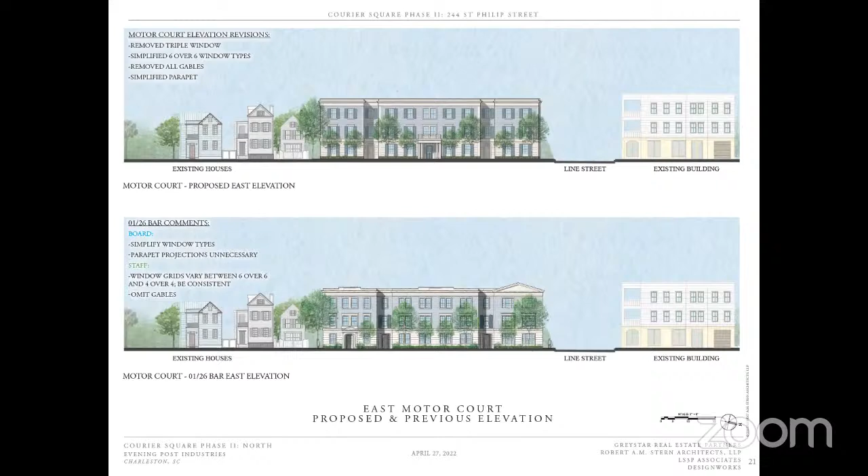Before on the bottom and the proposed on the top, the same general comments about simplifying the window types, looking at parapets, looking at gables. Next, please. And then the before and after.

So we tinkered with the plan so that the main entry, which in the earlier scheme was on the bottom left on the southern side, we've relocated it to the center of the building, which seems to be a logical idea. The hyphens in between the 3 pavilions have been pushed back farther, and then we've simplified the eave line and are using mostly double hung windows with shutters on this facade.

Next, please. So here you can see in the plan, the entry in the middle, the 2 hyphens where the 2 stairs and the means of egress have been pushed back so we get lots of shadow and relief on this facade.

Next, please. And then finally, going to the perspective on St. Philip. Next, please.

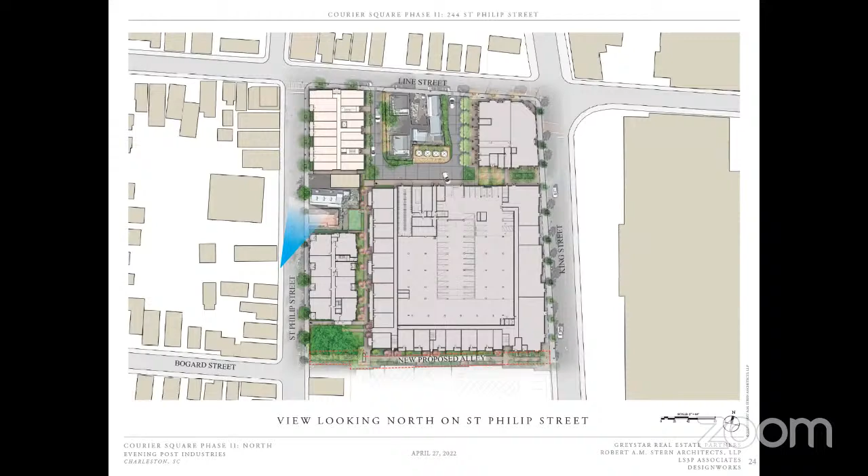Here you can see the existing. Next, please. And then this is the proposed. Next, please.

And then an enlarged elevation with the narrower porches, the changes with moving the south porch 1 window bay to the north, and then the simplification of the eave and the simplification of the windows and the addition of shutters.

So we look forward to everyone's comments and what people have to say. Thank you. Thank you, Mr. Brewer.

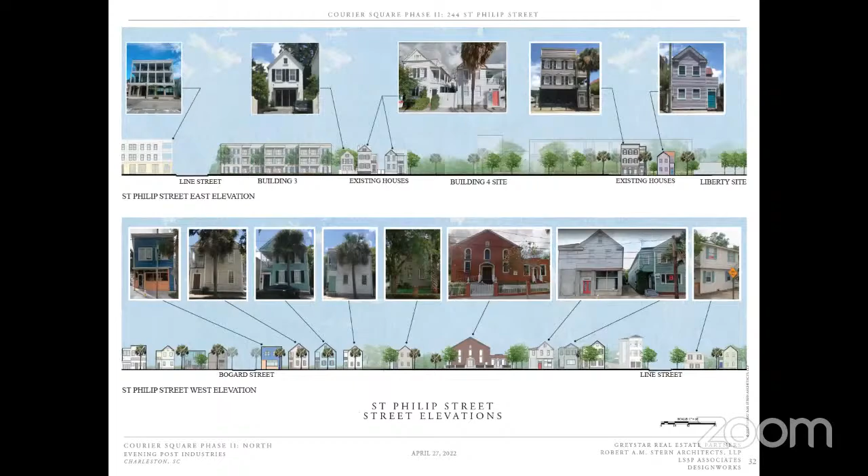Recommendation: the proposal appropriately responds to previously incorporated staff and board comments. This includes revisions to simplify the roof massing, which was a sticking point. The overall composition has been simplified and unified. We're recommending conceptual approval with board and staff comments.

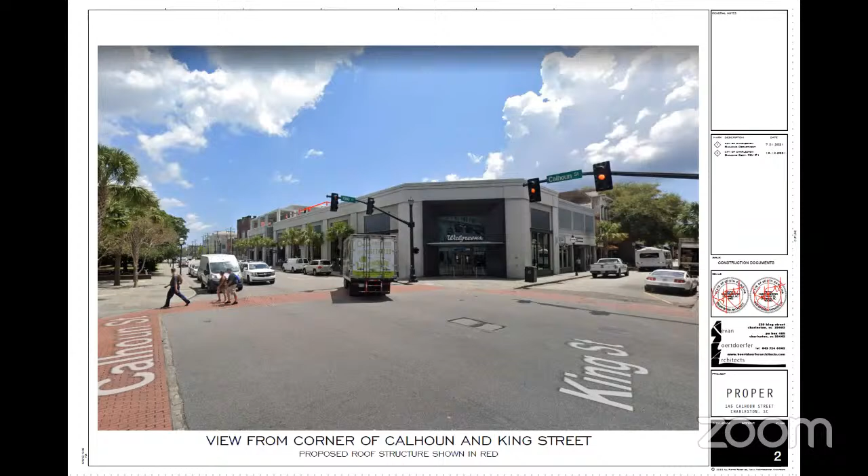Similar photos to what you just saw. If you look closely, there's a red line that outlines where the proposed new steel trellis is from different viewpoints. Next slide. Here it's from essentially the middle of the street, but it's just over the parapet to the right.

I do want to point out one thing on these existing photos as well. The channels within the steel I-beams on the trellis are pretty close together, so the relationship between the solid trellis and the open space is more closed than open, which will come into the conversation when we look at what we're proposing to cover it.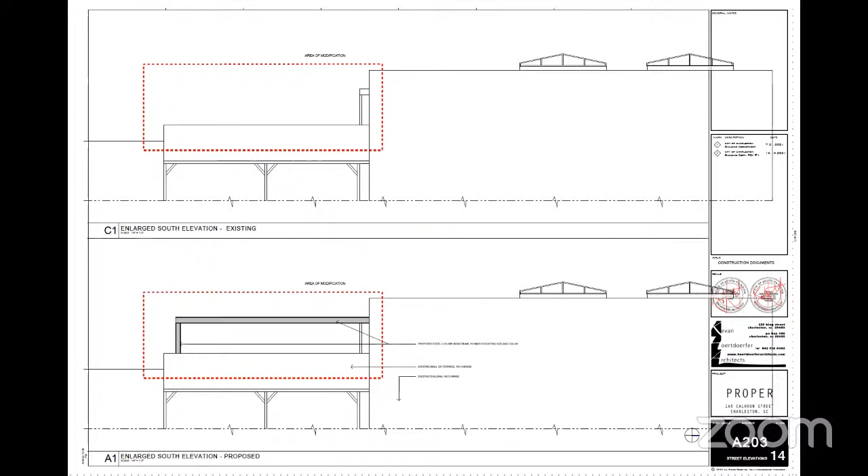This is a section showing the new location of the steel structure, and then from the rear of the building, essentially from the parking lot, if you know the area.

Section through the structure showing the existing steel, and what's hatched in red is the new corrugated sheet. And then a wall section of the proposed area.

I did have a preliminary conversation with the structural engineer. The spans are longer on the proposed new structural components. We can get either identical or close to the same size structural steel, though they'll definitely be thicker, maybe an inch or so taller. In the grand scheme of things, standing 70 feet away from the sidewalk, it won't be noticeable. As mentioned earlier, to scale, the gaps between the channels are turned down and the solid is definitely more solid than open. It's a very simple system with a single pitch to the exterior of the building and an interior gutter system behind the steel.

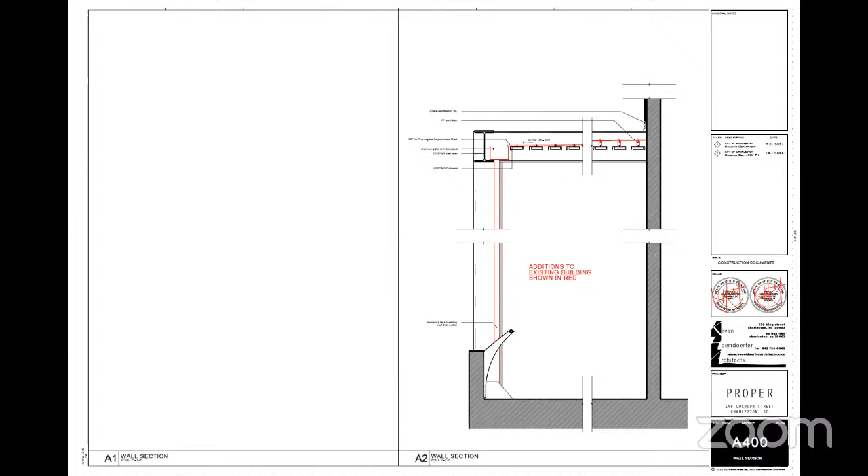Thank you, Mr. Richter. Any public comment on this agenda item? No, there's no written comment.

Thank you. City staff comments and recommendations: the motion for deferral is to allow for proper documentation and clarity to be incorporated into drawings. Height dimensions have been included on page A301 of the newest submittal. However, the applicant still needs to specify the location of all downspouts and provide information on the durability and aging effects of the proposed polycarbonate material, prior to or during preliminary review. I know you've touched on that a little bit tonight, and this comment is intended so that it can be addressed in the applicant's response. Otherwise, we're recommending conceptual approval with board and staff comments.

Mr. Richter, any response? Yeah, I agree, I think it should be part of the conversation. We've talked to a structural engineer and looked at materials. If this is something staff and board will approve, we would obviously proceed accordingly.

Thank you. Very good. Board discussion and a potential vote on this agenda. I think our previous comments have been satisfied.

I do as well, and I'm also confident that our staff are experts on materials, be they novel materials or otherwise in their application here. So I'm confident that board staff, with the staff comments being integrated, be they about the downspouts or about this translucent material, will get resolved. Further board comments?

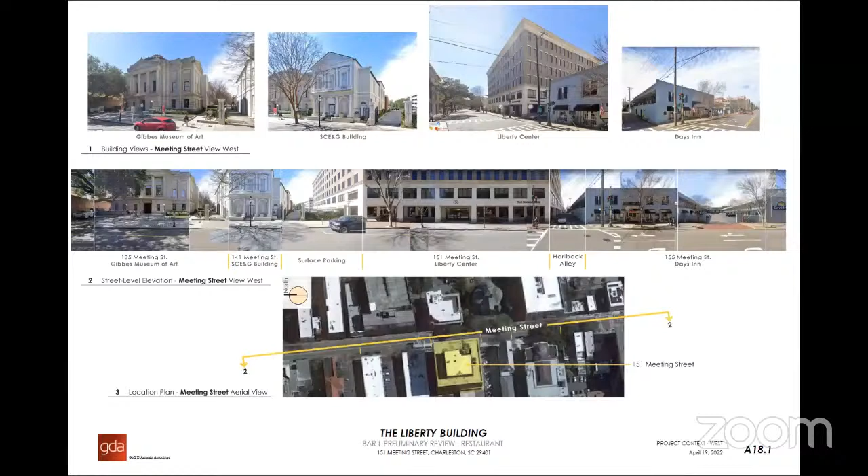So we took off the furniture layout for now, but we're proposing to have two 21-foot wide sliding glass door systems that will really open up this space onto the patio and invite the street activity to this new tenant. Main entrance is still going to be on the south of the building. Materials here will be blue stone on the pavers on the patio to match the main entrance to the building. Slide, please.

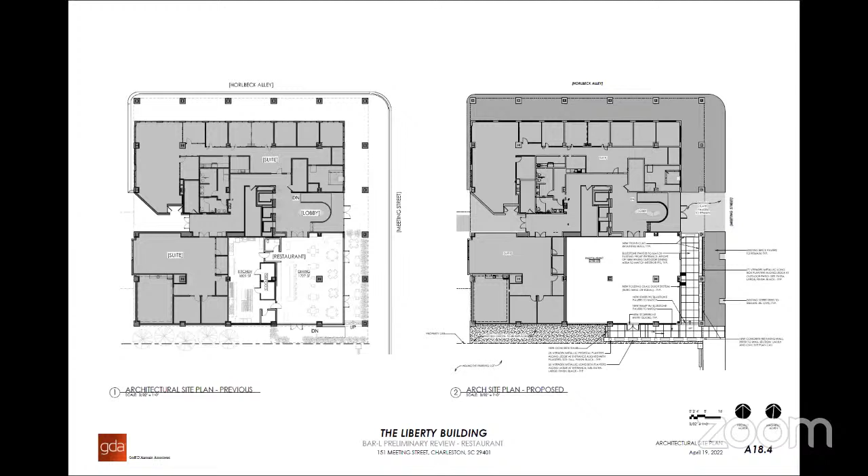This just shows you an idea of the ceiling of the canopy, and we're proposing to have a wood ceiling and the expanse of that, mainly just to give access into the building with rain cover. A few changes that we did make from conceptual to preliminary was to more relate the glazing openings to the building and the 24-foot bay structural spacing. Next slide, please.

Yeah, these are just elevations. We've further revised the canopy to have tie rods back to the south facade at every 24 feet, which relate more to the structure, and having a simple canopy rather than a structure with columns, we feel better integrates into this building.

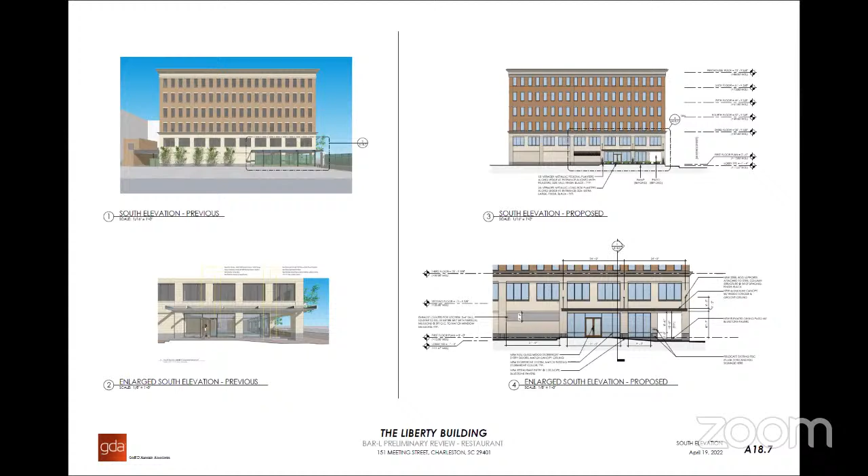These are details showing the sliding glass wall, and if you go to the next slide, the proposed canopy. One of the comments was that it looked prefab, so we've definitely integrated this canopy into the building with tie rods back to the structure, to provide that cover for the new entrance at the corner.

Next slide. These are materials, we're looking to match the existing materials as best we can and use black as an accent color. That's the color of the storefront now. Next slide, please. These are perspectives showing the new canopy and the new sliding glass walls open, the proposed raised planter patio area, and the new restaurant entrance. Next slide.

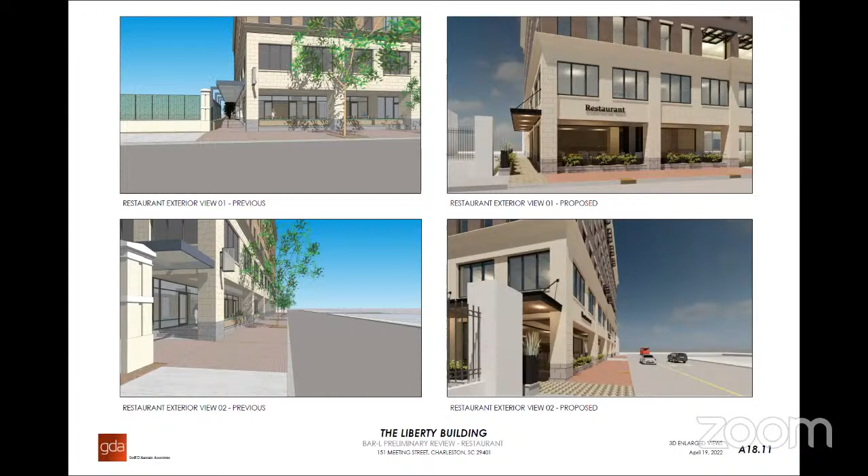And really the proposed is not a whole lot different, except we're using the existing openings more so, relating that back to that 24-foot bay. Next slide - I believe this is the overall. This gives you an idea - we did get preliminary on the loggias, so it shows the loggias having those overhead doors, and also the canopy at the south corner.

One thing I did not mention was the louver. There was a board comment about how to address the kitchen exhaust, and we're working with an internal system to exhaust out without having any mushroom or anything on the building. So we proposed a louver that will be able to handle that capacity. We still have yet to design what's inside because we need to work with that kitchen consultant at that time.

That's all I have. Thank you.

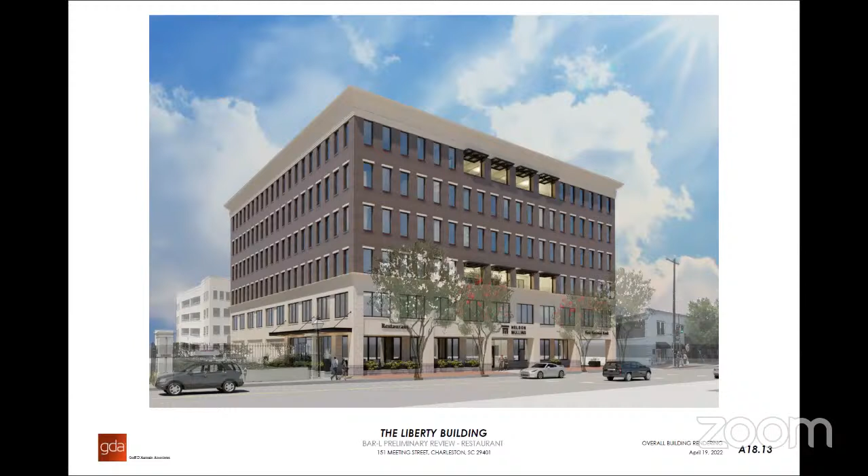Newest proposal is a change to a sliding glass wall system from the previously approved fixed storefront system, and the expanded ground floor openings. The application does not depict the storefront system's appearance when closed, but in general staff is not opposed to a fold-away system. Unless required, the sliding glass system should fold away to the interior.

FDC signage should be closely coordinated in color to work with the building's exterior while adhering to fire marshal requirements. Applicant to determine if the existing FDC signage can simply be relocated or replaced with similar in kind. Third, tenant signage to be reviewed separately. Fourth, the very visible new exhaust louvers at the south elevation shall be painted to match the adjacent wall material. And fifth, bluestone currently exists for the primary entry to the building, and staff is neutral to the proposed change at the restaurant entry.

While the slide may say conceptual, it's supposed to be - we are recommending preliminary approval with board and staff comments. That was my mistake, that is okay with all the material we have to cover.

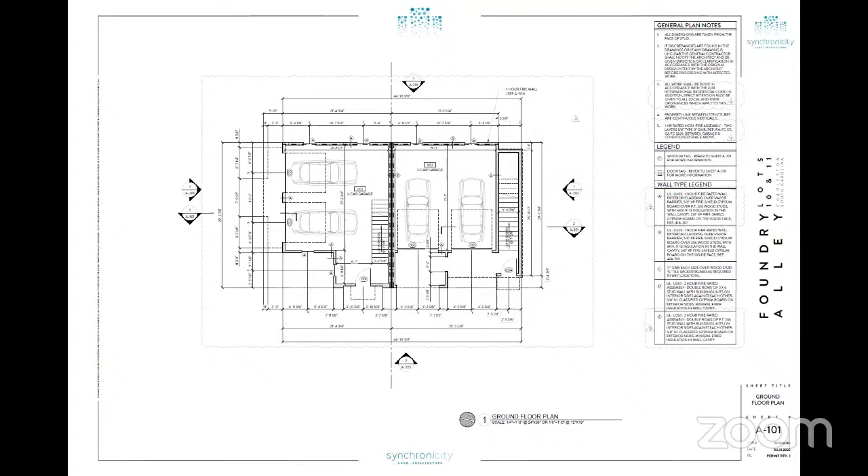Yeah, there must be some good cause. That's why what we normally have done is just, if they're not here, we pull it, because the process is so dependent upon the applicant presentation.

That's right. Like with BZA, if no one objects, there's no presentation, but there's always a presentation. Right, and the staff's inclined, and we know what the comments are. I think we're all sympathetic and it's probably passed, but if we get into a discussion and it doesn't, then we've created a problem for ourselves.

So, but we should, Mr. Chairman, I do want to acknowledge that every other applicant was. I know, and for consistency's sake, it's not like these have always happened and suddenly.

Sounds good. Thank you, if that's okay. It is fine with me. I figured it was good.

Mr. Chair, thank you all for your patience and being here. For the record, my name is Courtney. I am staff architect for the city of Charleston. I am here before you this evening to request that we discuss and hopefully arrive at a solution to some issues that staff is facing concerning signage.